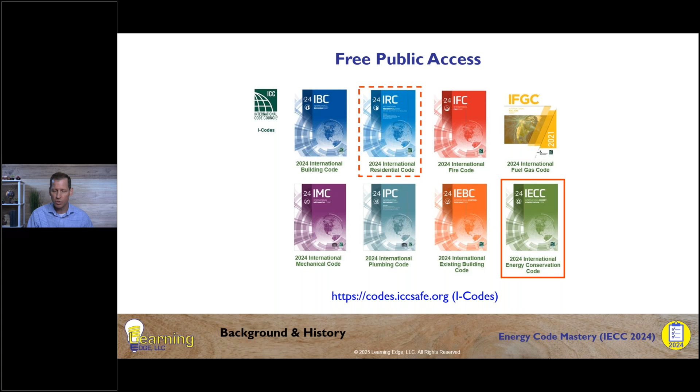We're going to focus our attention almost exclusively on the IECC. That's what our class is about. But, as Mike said, we're going to do a couple of detours into the IRC, because there are things in the IRC that are directly relevant to building science and building energy efficient homes. So I will point that out as we go through the different sections of today's presentation.

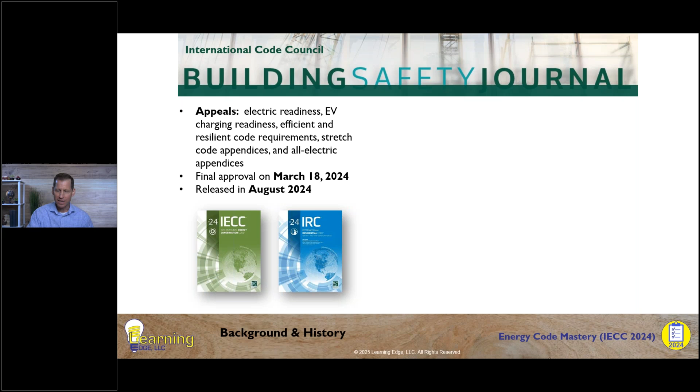So there was a lot of appeals and discussion. Well, the ICC board finally approved all of that, got through the appeals process in 2024, on March 18th. And then that's where in August, they finally released both the IECC and the energy section of the IRC, which I'll clarify in a moment.

So going forward, I think to avoid this problem, what the ICC has talked about is a continuous maintenance process specifically for the IECC and Chapter 11 of the IRC, which is the IECC. So we'll come back to that here in a moment.

The codes, in order to understand what you need to do inside the codes, you need to know what climate zone you're in. And so the climate zones follow the county lines, and the country is divided into 2 sections. Either the west part of the country, except for the coast, is climate zone B, so that's where the B comes from. And if you are east of that imaginary line down the middle of the country, you're going to be getting that designation of A, which is moist.

And it's important to have those two designations because dealing with moisture versus a dry climate is going to make a big difference, of course, we know when it comes to building science and the performance of buildings.

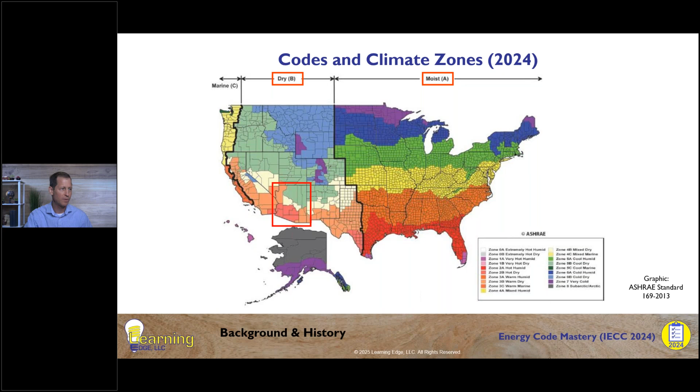And so now let's take a second and talk about that differentiation between the IRC and the IECC. So Chapter 11 in the IRC is the IECC. So if you just wanted to buy one book, you could buy the IRC and you would have the IECC as well in Chapter 11. When you're in the IRC and you go to Chapter 11, one thing you'll notice is it cross-references back to the IECC. So that's where the parentheses come in. 401.2 would be that equivalent in the IECC. So that's how those two work together, but it's identical language.

And it's one of the reasons why the IRC was delayed for a little while, and then finally they released the IRC except for Chapter 11. And that's why we saw on the website, they said, except the energy section.

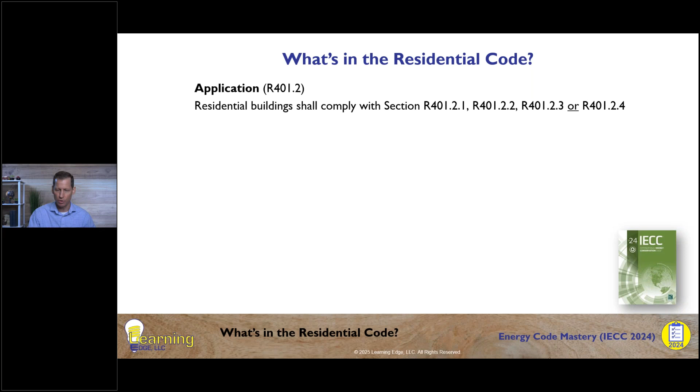Okay, so first off, let's talk about the sections of the code that apply directly to residential buildings. They need to comply with either 401, 21, 22, 23, or 24. These are the traditional pathways that are defined inside the code. So there's a prescriptive compliance option. There's a simulated building performance option.

They added simulated this 2024 cycle because that's exactly what it is. It's the simulated or performance option. They also have the energy rating index option and the tropical climate region option. Those are the divisions within the code, if you will, the pathways. We're going to actually subdivide this a little bit more because there's even more granularity than that.

So the big thing that they added in the 21 code were these efficiency packages. So in other words, you got to meet the code, but then they want to juice it a little bit more and kind of push you down on your efficiency or increase your efficiency, whichever direction you choose to look at it. And so what they added in the 21 code were these efficiency packages, okay? And so the efficiency packages prior to the 2024, I'll show you what those packages were, and you basically needed to go through and pick a package and you were good to go.

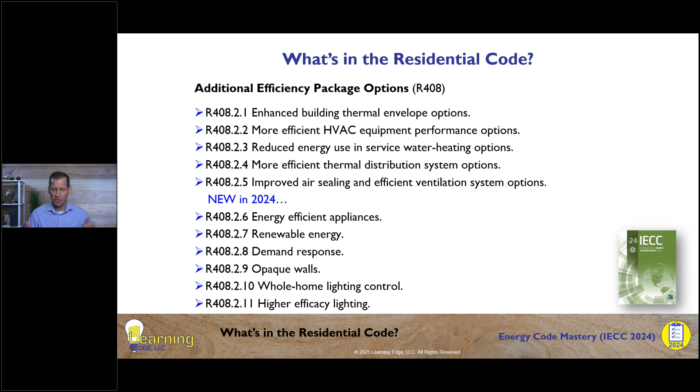If you're not doing the prescriptive path, then everything I'm going to share with you right now, you really don't need to worry about. But there are a fair number of people that still do the prescriptive path. And so picking these packages is essential. And so we want to make sure that you're comfortable with what these are and how they operate.

So one of the things they did in the 24 code is they decided to take the tables and turn them. So most of you remember that the tables up to the 21 code had the climate zones down the left side, okay? And then they put the different options across the horizontal axis across the top. Well, for I think good reason, and it makes sense, what they did is they inverted that so that now we're talking about climate zones across the top, and whatever content they're trying to get you is going down the left side.

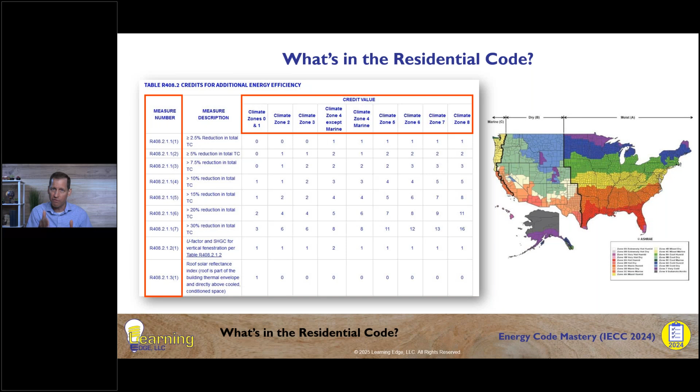And so if you're in climate zone 0, 1, 2, or 3, you're not going to get any credit for doing less than or equal to 2.5% reduction in your total thermal conductance. But you will get credit in the colder zones. So again, you've got to refer back to this table. I'm going to maybe peek at it a few more times today, but I wanted you guys to know that depending on what climate zone you're in, it will define how many points you'll get within each of the categories.

Okay, so the first package is enhanced building thermal envelope options. And one of the things they added in the 24 code that's new is this term that I've already thrown out to you, which is thermal conductance. So we haven't seen thermal conductance, but it is now defined in the code, and you can see that definition over on the right-hand side. Normally we think of U values and thermal performance, but now they've added in another term that we're going to see throughout the code that we need to be familiar with, and that is C factor or thermal conductance. So you'll see that as we move forward.

I just showed you this table. Depending on what you can do to increase the performance of your shell, your envelope, the thermal conductance of your envelope, depending on what climate zone you're in, you're going to be able to get points. And remember, we've got to get 10 points in at least 2 categories if we're in the prescriptive path. That's our objective, and you start accumulating your points throughout the table. And this is one package for the first set of options.

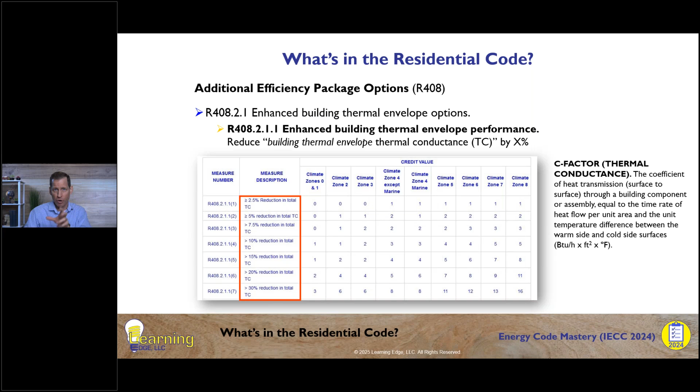Next is enhanced building thermal envelope, improved fenestration. So the last one was improving your thermal envelope, your insulation values, and your shell.

Now, the next option under thermal envelope options is roof solar reflectance index. So now if you do something on your roof in order to make it have greater reflectivity, which is again lighter colors, you can see that now you can get points in this category if you choose to. So I'm not going to spend a lot of time. You guys will get the slides and you can see the highlights as we go through.

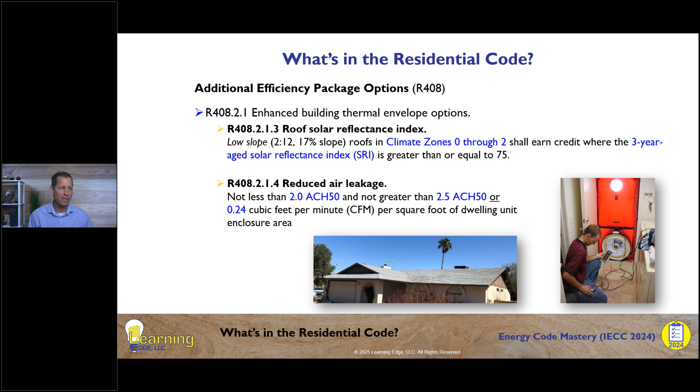Next is reduced air leakage. So in your thermal envelope, if you reduce your envelope leakage to not less than 2. Notice that, this is new, I haven't seen this before, they're actually putting a floor on there. It used to be just don't be any leakier than 3 air changes per hour, 5 air changes per hour. But now what they've done is they said, yeah, no more than 2.5, but we also don't want you to be tighter than 2.

So that's one of the things they've done, they put a little floor on there so that your building will actually still have some leaks. So that's new. Haven't seen that before in the code. They have an alternative of 0.24 cubic feet per minute per square foot of your shell. So you can alternatively calculate the area of your shell, and 24% of that area would give you your CFM50 blower door number.

More efficient HVAC equipment. So this is the second option of packages. So what can we do for more efficient equipment? There's a lot of detail here. You can do option applicable by climate zone. Well, the first one's all climate zones, I'm sorry. So depending on what you do, you're going to be able to get points. Then we've got certain options that are applicable only in your warmer climates, 1 through 3. They have options that are applicable 4 through 8. And then more efficient HVAC equipment for climate zone 4 alone. They do have a specific option for that.

So again, we could spend an entire day going through these packages in minute detail, telling you what all those options are for 0, 1, 2, and 3, but you guys can read the code for that. I want you guys to know what's in the code and make sure that you walk away today going, okay, now I understand what I'm dealing with, this new beast called the 2024 IECC. And so you can spend more time looking into that on your own time and understand this package. And remember, it's if you're doing prescriptive path. If you're doing performance path, which quite frankly most builders will do, then you're not going to even worry about this stuff anyway.

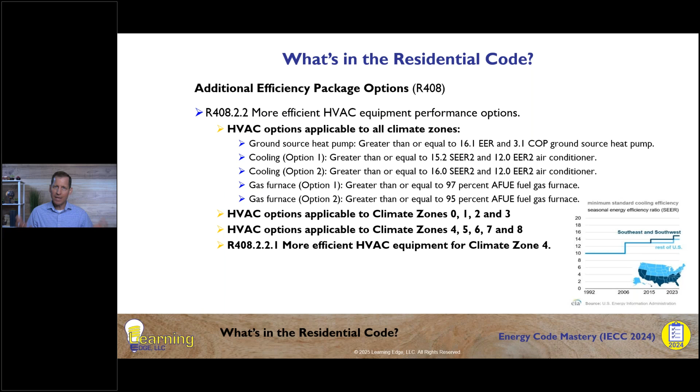Next is compact hot water distribution system options. So within the service water heating, if you are able to create more compact plumbing, you can see the illustration on the right, basically instead of trying to feed the water to the other side of the house, they put in a second water heater, tankless in this case. And so now the run from the water heater to any one of the fixtures is going to be much closer. In fact, the definition is not more than 16 ounces of water being stored. Okay, so that's actually a pretty small number. That's 1/8 of a gallon.

Some of you might be familiar with the WaterSense program and even Zero Energy Ready. They also have requirements for keeping our wasting of water as low as possible, which also translates into not having to heat our water as much. But that is a half gallon, okay? That's a half gallon of water.

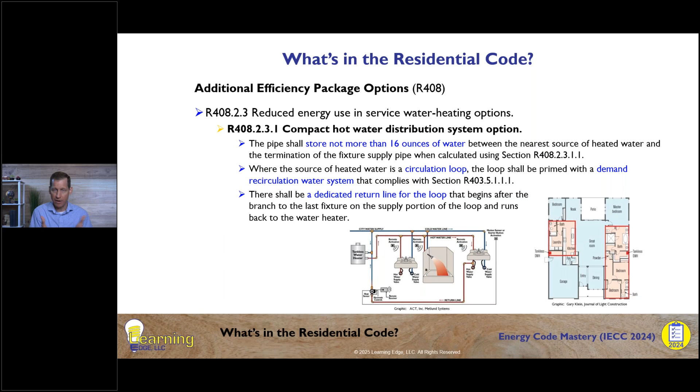And so in the code now a demand recirculation system is what's required. And then a dedicated return loop is also required. You can certainly do hot water recirculation systems that use the cold water line to send the water back to the water heater. But in this case, in the code, they're going to want a dedicated line going back.

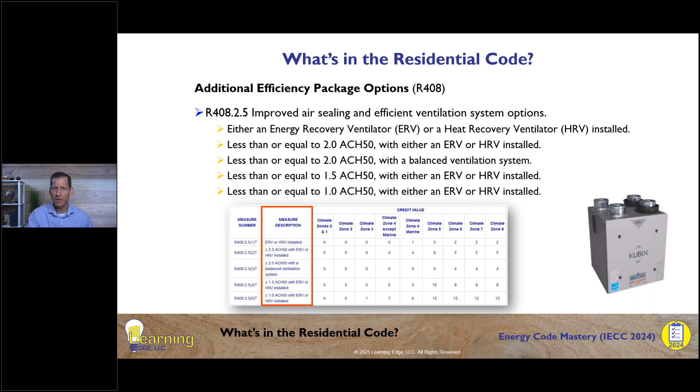Now, improved air sealing and efficient ventilation system options. Again, these were all from the 21 code, but they've beefed these up quite a bit more and changed them for the 24 version. So again, you've got options here. Pick one of these, either an energy recovery ventilator or heat recovery ventilator, HRV, ERV, or less than or equal to 2 air changes per hour with an ERV or an HRV installed. So depending on what you're doing, you're going to get more points, of course. The tighter your envelope with the HRV and the ERV, the best ventilation is going to be from an HRV, ERV. And I love that the code starting in the 21 version has been adding in HRV and ERV. We'll talk a little bit more about that in a moment.

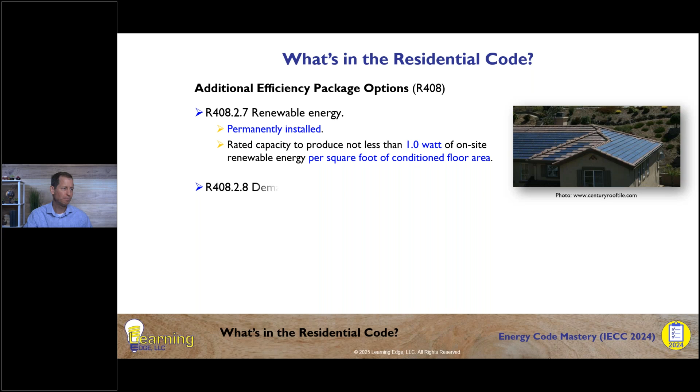Demand response. This is also new. They've added in demand response thermostats. And what's neat about this is what they're trying to do, and lots of things are pushing in the direction of allowing there to be bidirectional communication to our connected appliances, water heaters, programmable thermostats, pool pumps, EV chargers. If those can be in connection and allow for demand response, now we're into an area of virtual power plants, which is an exciting thing that we're now starting to see with the utility companies. And the code has now weighed in on this.

The code is now saying there's a package where you can do demand response so that it will allow for voluntary participation in a utility provider demand response program. And by the way, Mike mentioned NV Energy. They have their Power Shift program.

That is basically a demand response program where they are able to talk to and communicate with all the thermostats in the NV Energy area and send a signal to adjust that thermostat so that on a peak day in Las Vegas, when it's super hot and they know they're going to have a peak, they can send a signal out and then help to manage that demand by taking thermostats and adjusting them.

Now, in those programs, I have to clarify, you can always override it. It's not as much Big Brother as you might think. You can override that if you don't like what's going on. But most of us are not at home and we're working during the peak. We're not there. So for most of the people, they're not going to override it, and that's a huge benefit for shaving the peaks off of our demand curves.

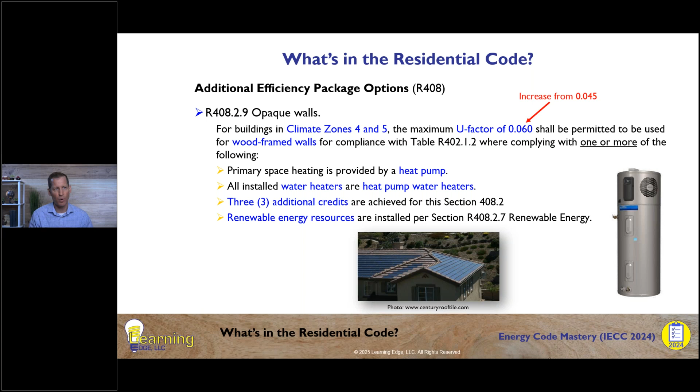You do a heat pump water heater, heat pump on your system. 3 additional credits also in another category. This is just giving flexibility, right? If you can't quite get your envelope to be at the 0.045, this will allow you to have another option.

Whole home lighting controls, right? If you put in whole home lighting controls, there's an opportunity for you to get credits that way. Higher efficacy lighting, okay? All spaces shall be provided with hardwired lighting with lamp efficacy of 90 lumens per watt or luminaire efficacy of 55 lumens per watt. So this is a way of incentivizing putting in more efficient light fixtures.

And you can see when you go back to the table, though, a little bit of a head scratcher. I'm not sure that I quite understand this, but if you decide to do high efficacy lighting, 408.2.11, like we're talking about here, unfortunately, there's no credits to be given. So I'm not sure why you would do it. And I was hoping that maybe when I went back to the code yesterday to see if they had updated, this would change. But quite frankly, it's not.

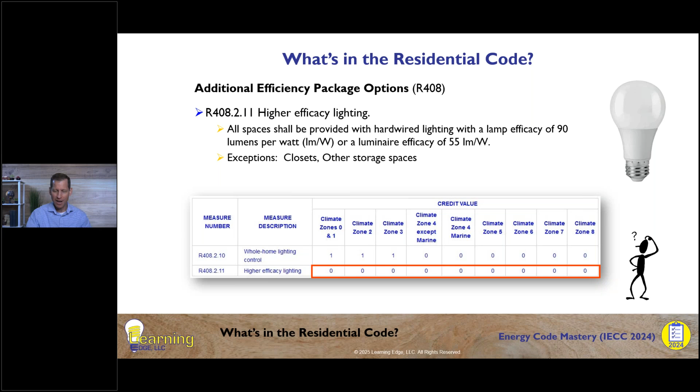So I don't know why anyone would do 408.2.11 when you get 0 points for doing it. I guess it's a feel good. But I thought that was a little odd. But keep that in mind when you go into the code, you'll see this.

All right. So those are the packages. That was the last of the packages. I just wanted to give you guys a highlight so you knew what was in there. We had some original ones. They've beefed those up and they've added in a bunch more packages. And really, if you go and read the preface to the code, which I actually geeked out and did, they talk about how what they're trying to do with the 24 version of the code is create more flexibility, more options in order to comply with the code. And you can see in some ways they've actually been able to do that.

So what I want to do now is look at sections 402 to 404. We're going to look at some of the verbiage. We're not going to go through it page by page, line by line. I'll try to use as many pictures as I can. But I just want you guys to see the highlights of 402 to 404 and section 408. What is it that's in there that I think you should pay attention to? Now, this stuff applies to prescriptive specifically, all right?

Hold that thought for a moment. The first one I want to talk about is 402.2.1. A lot of people are not aware of this kind of hidden item in there. And that is that if you get your insulation in your attic over the top of your exterior walls, over the top plates, all the way out to the edge, then you're allowed in 402.2.1 to lower the actual R-value of your ceiling insulation.

Now, in the 2021 code, one of the things they did was they followed the ill-suited, ill-defined concept of more is better, because more is not always better. And in 2021, what they did is they said, well, we got to keep pushing that glide path to net zero, so we got to throw more insulation somewhere. So let's go to 49 in climate zones 1 through 3.

Well, I'll tell you, R49 in an attic in Phoenix, where I am, makes no sense at all, okay? Makes no sense at all. Yet, if you're prescriptive and you're in Phoenix, you got to do 49. And then in climate zone 4 through 8, you had to go to 60.

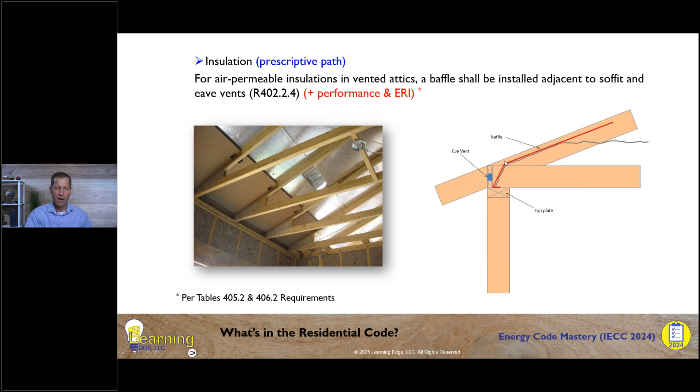This is for air permeable insulation, okay, like fiberglass or cellulose, not foam. For air permeable insulation in vented attics, a baffle needs to be installed, right? So we've got to install baffles so that when air comes in an eave vent like this, the air will push over the top of the insulation, okay, instead of blowing that insulation back.

Now, I want to point out that I added in here prescriptive because this 402.2.4 applies to prescriptive, but this also applies to the performance and the ERI path, okay, 405 and 406. But you need to know that one of the things they did back in the 2021 code, and they've continued forward, is they've created a table in section 405 for the performance. And in that table, it will list the things that you need to do in sections 402 through 404.

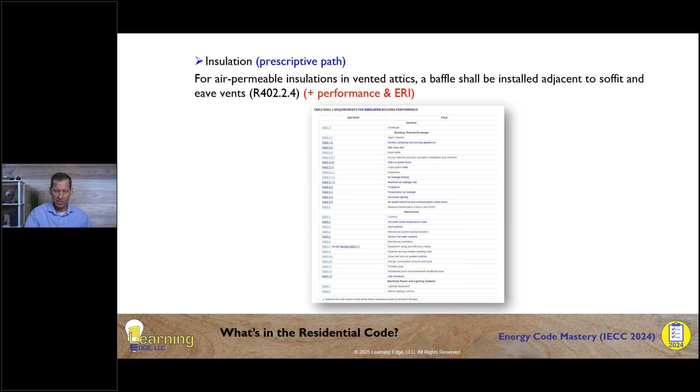So it used to be that they would actually say mandatory or prescriptive. Well, in the 2021 code, they actually put a table in there. So if you want to know what you have to do in section 405 out of the prescriptive requirements, you got to go to this table, okay? So for example, if 402.2.4 is listed in the table, that means in section 405, you've got to follow 402.2.4 in the code.

So I don't know if this made life easier or harder. I think the jury's out. They kept it for the 2024 code, so maybe people didn't scream loud enough if it was a concern. But this is how you navigate the code now. You got to go into the table, and it'll tell you what to do. In the 406, it does the same thing.

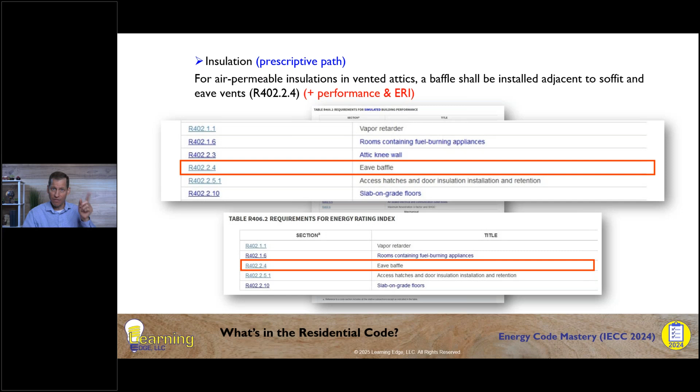So in the ERI path, they have their own table, and in that table, it will tell you what you've got to do out of the prescriptive requirements, 402 to 404. Okay, so that's how you navigate the IECC when you're in 405 and 406. So what I will do now throughout is I will put in red if that section also applies to the ERI and the performance path.

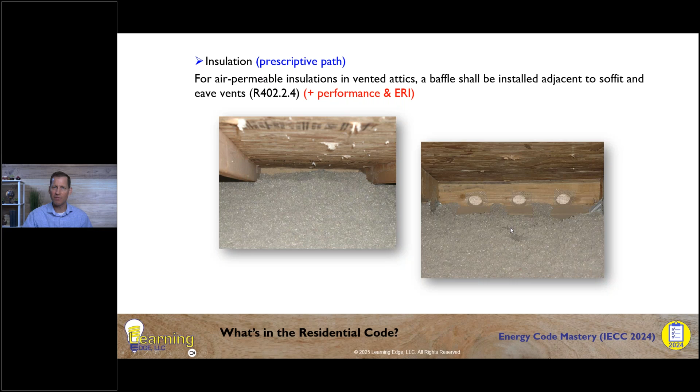But back to this thing. If we have insulation that does not have a baffle in it, here's the eave vents. What happens is eventually the air, the wind coming in will blow that insulation back. And then what we end up with is in the summertime, these smiles up there, this is what it looks like. And so this is why we need baffles, so that that air will come in and it won't push back the insulation. So we need baffles. And again, this is what they look like in order to make sure that that insulation does not get disturbed.

Incidentally, on O'Hagin vents, that's the high vent and the low vent. On the low vent, you also need to baffle that because air can come in an O'Hagin vent and also push that insulation out. Then you got this nice hole below or around it, and that's not going to work. So on the low O'Hagin vent, you really should baffle that as well. That's a good thing for just good building science to do that.

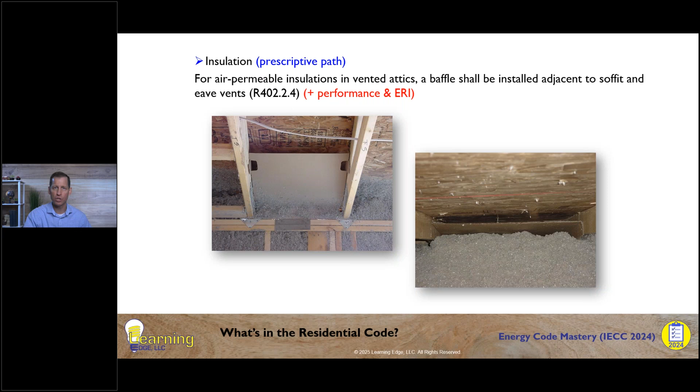Attic hatches, okay? Attic access hatches and doors insulated to the same level as the surrounding insulation. So if you got R30 in your attic, that attic hatch, that little scuttle hole, that's got to be R30 as well. And I'll just tell you right now, gluing a fiberglass batt to a piece of drywall is not going to cut it. Okay, this is a perfect example of what I see all too often when I've been up in attics. They've glued the paper and the paper tears.

Or let's just say you just did a great job of stapling it on there, gluing it on there. Remember, batts, they fall apart along their grain real easy. They tear apart super easy. So that thing eventually from going up and down, that batt's going to be off on the side, never to be seen again. And of course, then we're going to have attic hatches in the summertime that look warm. So this is exactly what it looks like with infrared when you don't insulate an attic hatch.

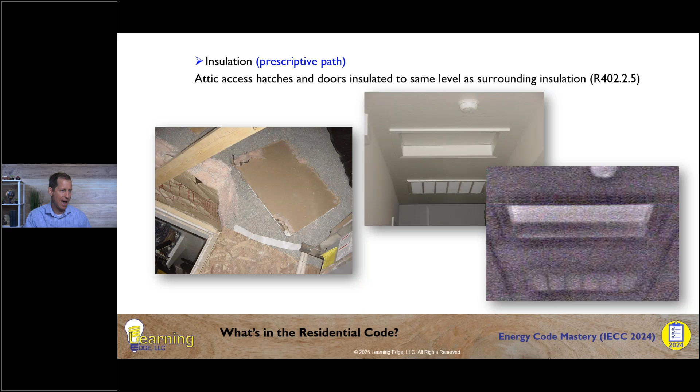So what we really need to be doing is putting a piece of foam on there, okay? So gluing a piece of foam onto that is going to give you your R value equivalent. This is a high density polyurethane foam. So we're going to get much more R value per inch. We don't need as much foam stacked on or glued on there, but that's the way to go. So this is another piece of the attic retention. The attic is the retention piece, okay?

So in here we have, first off, weather stripping. So you've got to make sure you put weather stripping on your attic hatch. Typically, we recommend Q-Lon strip, okay? So this is going to be what we do on the doors that we do for our front doors and our exterior doors. Just take that, turn it sideways, and that's a vinyl strip that is far, far better than the lick and stick or peel and stick foam. That stuff doesn't last very long, but use the vinyl, and this is a great way to air seal.

And then also an insulation dam. This is part of retention. This came up actually in the 21 code. They added it in. I really like it. It's the idea that we put retention on there so we can get our insulation right up to the scuttle hole at full depth. So whatever the depth of your insulation is, you need to make sure the dam's high enough to be able to retain it so it doesn't tail off as you get close to the hole. We can get full thickness right up to the door.

They also added in that when you change ceiling heights within your attic, you're going to run into the same problem where the insulation will tail off right to the edge. Put a retention in there so we can get it all the way to full height, all the way out to the exterior. And then we have the same addition in the code, which happens to do with porches.

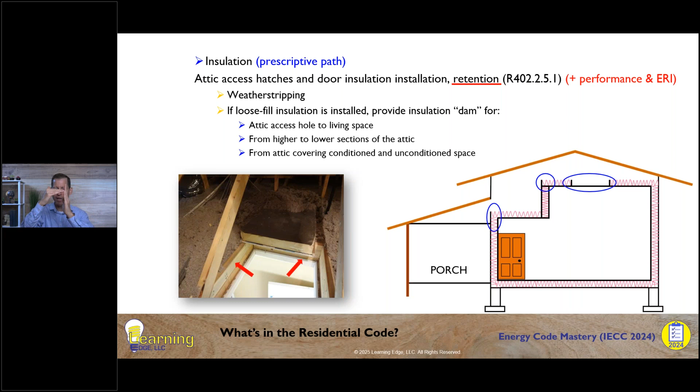So if your porch is not at the same elevation as your ceiling on the inside... if it were, they can just blow the insulation a little bit over the top of the porch, maybe 2 or 3 feet over, and we'll get full thickness before it tails off. But if there's a height change, we don't have that. So it's good building science. I love this, to put a dam in there so that we can get our full thickness, full height of insulation all the way out to the perimeter.

So if we've got, say, an 18-inch deep floor truss, and our insulation is 12 inches deep, okay, you got a 6-inch gap all the way around because that insulation doesn't fill that entire cavity. So I love that they talk about ensuring that we get that perimeter insulated.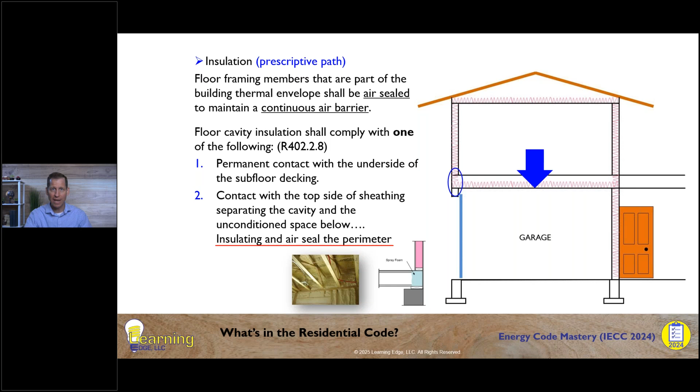But if you've got foam on your project, you definitely need to make sure that those rim and band joists are hit with that foam. If you got a truck out there, take advantage of that to get those rim and band joists done correctly.

Basement walls, okay? This is climate zones 3 and higher. Basically, you got to follow what the table says. So if you're in climate zones 3 or higher and you go into Table 402.1.3, which we'll glimpse at here in a little bit, it'll define how much insulation you need. What we define here is what that layout needs to be for the insulation.

So it needs to be, if you've got... let me back up, I went a little too fast here. If it's an unconditioned basement and you've insulated your floor, then you don't need to worry about your insulation down there, you can ignore it. But if you're not insulating the floor, you've got to make sure that your insulation goes down at least 10 feet below grade or to the floor, whichever is less.

Slab edge insulation. All right, for slab edge insulation, this is actually a little bit of a change from the 21 code. And you can see here that a kind of holdover from the 21 code is that if you are in climate zones 0, 1, and 2, you do not need slab edge insulation. In a hot climate like Phoenix, climate zone 2, you don't need that. But 3 and higher, you're going to have to put that in.

Okay, what they added in to the 24 code is they made it clear that if you have a heated slab, no matter where you are, even in climate zone 0, 1, and 2, you're going to need to put in a minimum insulation on your slab edge and under the full slab. Makes total sense. If you go down deep enough, the ground is usually about 55 degrees.

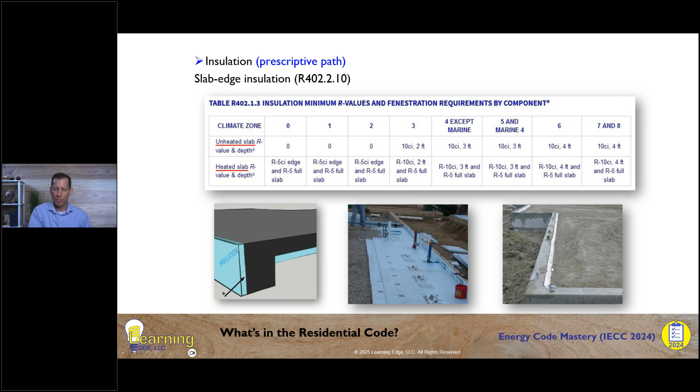Okay, and this is just one of those details that I kind of ran through a little bit there, is that you can put it on the inside of the slab, as you can see here, nice chamfer cut so that we don't have this big gap on the perimeter of our slab, or you can run it on the outside. If you run it on the outside, it should not be exposed.

This is a nice detail here. Ignore the disconnected downspout there, but the detail with the stucco on there, great detail for your slab edge insulation, making sure that it gets done correctly.

Crawl space wall insulation, okay? So where installed, crawl space wall insulation shall be secured to the wall and extend downward from the sill plate to not less than the top of the foundation wall footing. All right. So you've got that.

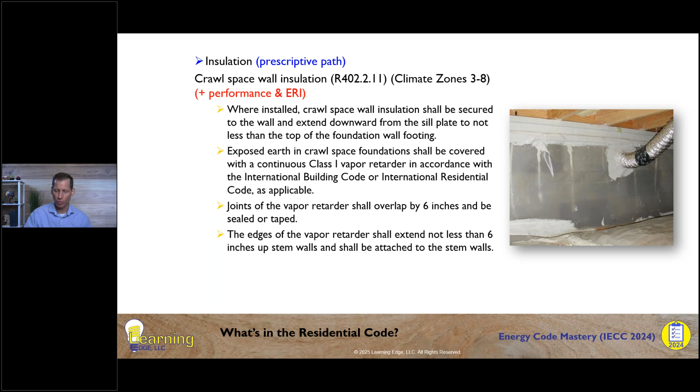You need to make sure that if you've got exposed earth, that you are covering that with a Class 1 vapor retarder. Class 1 is a vapor barrier. Okay. Vapor barrier, Class 1 vapor retarder. You've got to make sure those joints are sealed, make sure that it's lapped up and fastened around the perimeter. So they have clear definitions of, if you do a crawl space, what you need to do to comply with code there.

Radiant barrier, this is new. Prior to the 2024 code, there wasn't anything about radiant barrier in the code, but in 2024, they added it in several locations. So where did they add it? First of all, radiant barriers is in section 402.3. This is prescriptive path only. Where installed, radiant barrier needs to comply with ASTM C1743.

There's also, in the general definitions of the IECC 202, a definition of what a radiant barrier is. Okay, material having low emittance surface of 0.1 or less, which of course is the definition of a radiant barrier, 0.1 or less. They also talk about reflective insulation, okay, and what that means, because in the code, we're also talking about including that.

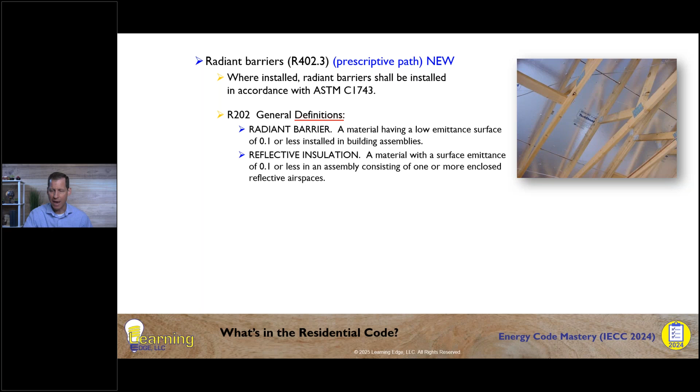They talk about airspace, where the R-value of an enclosed reflective airspace. So this is another place where they're talking about radiant barrier. And then 303.2.2, they talk about where installed. So these are the sections where radiant barrier was added into the code. I might have missed one, but I don't think I did. But the cool thing is that radiant barrier is now in there.

So you're getting credit in the code for radiant barrier, where before 2024, there really was no place for you to get credit in the code for doing it. Except, of course, if you did it in the performance path, your energy model could give you credit, and that's an indirect way of getting it. But the code itself outside of the performance path, you're not going to be able to get credit for radiant barrier, whereas now you can.

Fenestration, okay? This is prescriptive path only. The area weighted average of fenestration products shall be permitted. So if they call out a U-factor or a solar heat gain coefficient, then you actually can do the weighted average of that. So let's just say that the solar heat gain coefficient is 0.35, and you go into a house and you see 0.34, perfect, 0.35, check, 0.32, check, 0.36. You got one window at 0.36. Well, that window doesn't necessarily fail because of 402.4.2. As long as you've got plenty of windows that are below, then the area weighted average is going to be good.

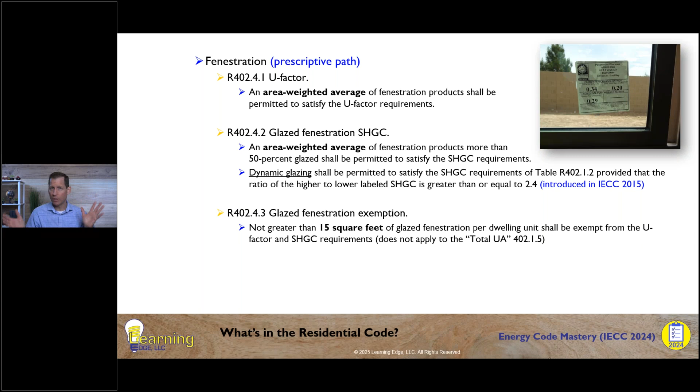They also do a glazed fenestration exemption. So you're allowed to have up to 15 square feet of window glazing that is not compliant with the code. So this takes care of the occasional butt jointed windows or things of that nature. So there's a little bit of an exemption there.

And then for opaque doors, remember, fenestration is both windows and doors. And so for opaque doors, there's also an exception. You get up to basically one standard size door, 24 square feet, that does not need to meet the code. They give you only one of those, I call it get out of jail free cards. You get that in the opaque door, 402.4.4. Okay, so air sealing is in the code.

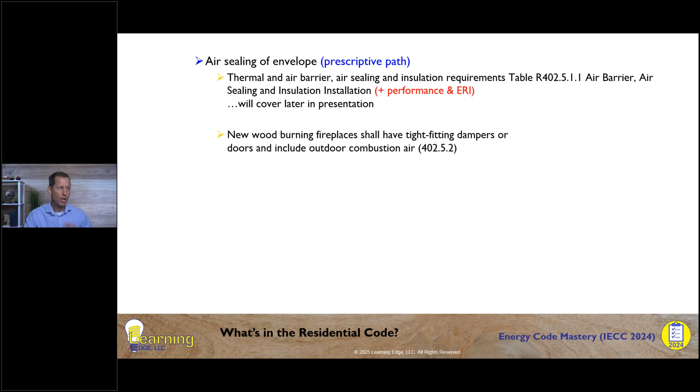It applies to prescriptive, performance, and ERI. Thermal and air barrier, air sealing, and insulation requirements are defined in table 402.5.1.1. That's the thermal bypass checklist in the code. I'm going to come back to that one when we get to the end on testing and inspections. New wood burning fireplaces shall have tight fitting dampers or doors. The code requires insulation contact airtight (IC-AT) light fixtures. Specific air tightness requirements for doors and windows.

Now, this is a little bit of a catch, because here's NFRC stickers where you get your performance information on windows, right? There's the U-factor, there's a solar heat gain number, which we've talked about. There's the visible light transmittance, then there's air leakage. But notice on this NFRC sticker, they put NA, okay? What about this one? Dash. On this one, they didn't even add it. There's not even a box for the air leakage. A lot of the time, in fact, most of the time, windows do not include this information.

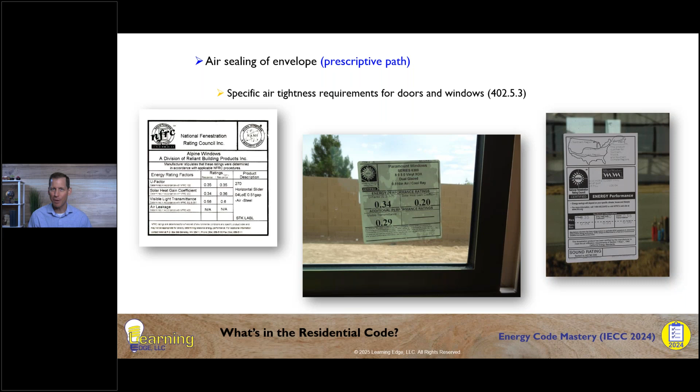Now you could go back, because the code has a specific requirement there, to the contractor, the builder, and make them get you a label or that definition of what is the air leakage on this window. But I'm here to tell you that is a hill you don't have to die on. Rely on your blower door number, okay, your envelope leakage. If all the leakage was in your windows, that means they'd have to tighten everything else up. So just rely on your blower door number, which is required, and don't kill yourself to get this information out of the contractor when it's not readily available. Just a tip on that. If you want to go all out, you can require the air leakage number for your windows. But again, it's not really that necessary because you've got blower door.

Electrical communication outlet boxes penetrating your air barrier. So if you've got an outlet box on your exterior wall, you definitely need to make sure that it is compliant with air tightness. It used to be in the 21 code that it was a little ambiguous, because it says electrical communication outlet box that penetrates the air barrier of the building thermal envelope. So if your air barrier is the exterior or the inside, that's where this applies. And then of course, the box needs to be labeled NEMA OS 4. This is the requirement that's in there.

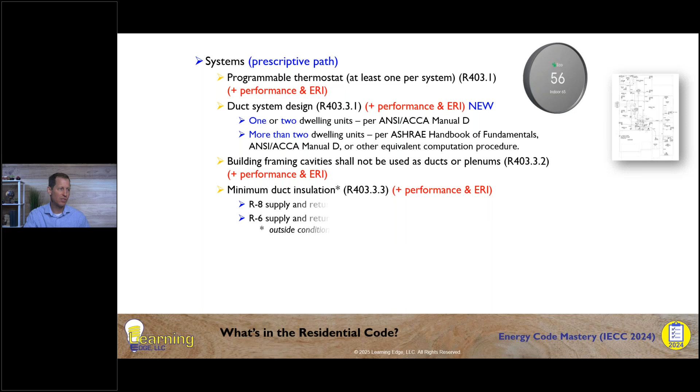Duct system design. This has been in the code going back quite a way, that you've got to make sure that your duct system design is, actually this one's new, sorry. The mechanical sizing's been around, but the duct system sizing is new. 1 or 2 dwelling units, ANSI/ACCA Manual D for duct design. More than 2 dwelling units, you can follow the ASHRAE Handbook of Fundamentals. So apologies, I got in front of myself a little bit. This is new. They didn't have duct design requirements until the 24 code. Building framing cavities shall not be used as a duct or a plenum. That's been around. Minimum duct insulation, R8 for your ducts that are bigger than 3 inch, but if you've got your high velocity 3-inch ducts, then you can go down to an R6.

To be considered inside conditioned space, they give 3 options for the ductwork: 100% within the continuous air barrier, ducts in a vented attic or unvented attic with vapor diffusion ports, or ductwork within the wall or floor assemblies. Each of these options, 403.3.4, I actually cover in my ducts in conditioned space class. So if you want to dive deeper into this and the code requirements, that's a great class you might consider taking to learn about the details. Ducts, air handlers, and filter boxes shall be sealed, all right?

Got to make sure that your ducts and filter boxes, they're all sealed. Air handler unit cabinet leakage no more than 2% of the designed airflow. Here's another item where your air conditioning unit manufacturers, they're not readily providing the leakage of their cabinets. Can you get it? Yeah, but it's not readily available. And you're not going to be having the rater test the tightness of your unit to see if it's 2% of design or not. This is another one, like windows, where I say, I wouldn't die on this hill, okay?

Don't demand to know that that air handler is no more than 2% leakage, because quite frankly, rely on your duct leakage requirements. As long as that thing hits the duct leakage requirements, you're good to go. So that's what I would do. And if the cabinet is too leaky, well, they're gonna have to have really tight ducts then.

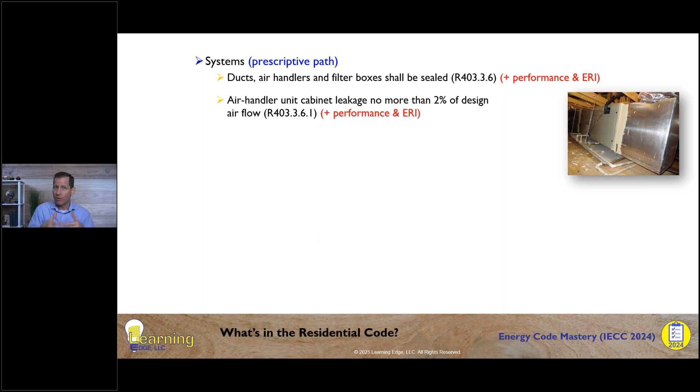So this is one of those things also as a code official, there are bigger fish to fry than fighting over this when we know we've got a duct leakage test that's going to tell us how tight our duct system is, and make sure it hits that number and you're good to go. Duct leakage testing requirements, I'll cover that when we get to testing.

Circulating hot water system installation criteria. So if you're going to put in a hot water recirculation system, there is a definition of how to do that. Some people confuse the fact that because the code talks about circulating hot water systems, that the code requires a circulating hot water system, but in fact it doesn't. The code does not require that you put a hot water recirculation system in. If you install one, you have to follow the code's criteria, but it's not required. And I'm gonna make that even more clear here in a minute.

So they do have a requirement for prescriptive, performance and ERI. In the 21 code this was only prescriptive, but in the 24 code, they added in performance and ERI. And depending on what you've got for your piping, if it's 3/4 inch or larger, or fits any of this criteria, you're gonna need to put an R3 insulation on that, you're gonna need to insulate it.

The minimum insulation is actually in a table and actually a formula. So it used to be R3, but now they've elaborated and there's a calculation to determine how thick your insulation needs to be instead of a one size fits all. Yes, it definitely got more complicated. Something that was simple now has been more complicated on your pipe insulation.

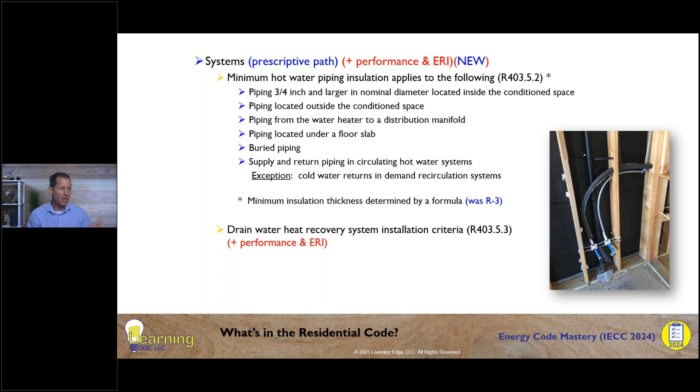Drain water heat recovery system. If you install one, they have installation criteria, because this does not require you to install a drain water heat recovery system. And the only reason I said something that's kind of silly is because, again, I've talked to code officials that require hot water recirculation systems. And I'm trying to say, no, you don't, it's not required in the code. It's only required to follow the rules if you install one, because not all homes are required to do a drain water heat recovery system.

Now, here's that mechanical requirement that I accidentally just misspoke on. So this is the design requirements for Manual J, Manual S that are in the code. You've got to refer, in this case, to the IRC. I told you there's a few places where you have to go and look elsewhere. This is one of them. So in here, you go and you look at the IRC M1505.4 for the requirements for the ASHRAE ventilation.

Now, what they did in the 24 code is what I suspected they would do: they added in an HRV, ERV requirement for climate zone 6. I wasn't sure if they were gonna add 6 and 5, but they added 6. So in the 21 code, you had to do an ERV or an HRV if you were in climate zone 7 or 8, and I love it. The best ventilation strategy is an ERV or an HRV.

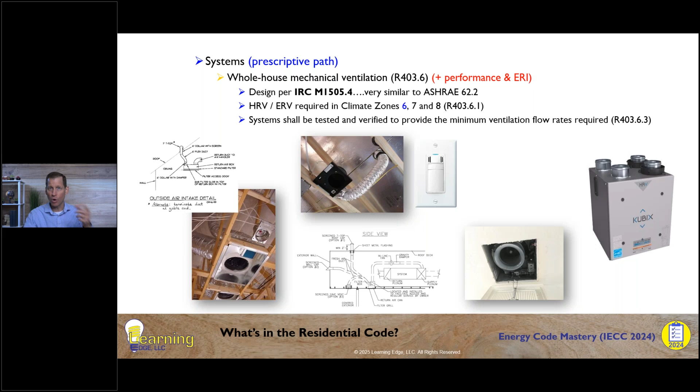And if it's really cold outside and you got to spend a lot of time indoors when it's snowy and cold and wintry, then you're going to need to make sure you have the best ventilation. So the code in 21 required that it be in climate zone 7 and 8. In the 24 code, they backed it up to climate zone 6. Lastly, the system shall be tested and verified to provide minimum airflows. And then we'll come back to this one again in the testing and inspections.

Intermittent exhaust controls for bathrooms and toilets. This is new, okay? This is new.

Where an exhaust system serving a bathroom or toilet room is designed for intermittent operation, the exhaust system controls shall be one of the following. So now what they're doing in the 24 code is they're saying that you've got to put controls on your intermittent exhaust, either a timer, occupancy sensor, humidity control, contaminant control; any one of these you need to include on your bath fans.

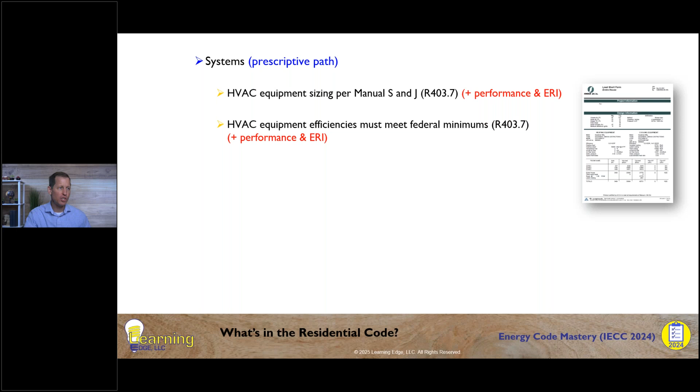Here's the sizing. So for HVAC equipment sizing, you need to follow Manual S and Manual J. This has been in the code, this is what I was saying before, this has been in the code since 2006. Equipment efficiencies must meet the federal minimum standards, 403.7.

Electric resistance space heating, this is new. This basically applies to 1 and 2 family dwelling units, climate zones 4 through 8, so your colder climate zones. If you're doing electric resistance space heating, they've got specific requirements that you need to do. Space heating capacity limited to no more than 2 kW. The largest space that is not used as a bedroom shall install a heat pump. So this is trying to get rid of the bigger energy consumption, which is electric resistance in buildings. So they do have this new requirement, 403.7.1, that is added in for the 2024.

Requirements for mechanical systems located outside. This is a new requirement in the 24. So if you're heating outside a building, snow melt systems, roof and gutter de-icing controls, freeze protection system controls, any one of these is going to require that you follow certain requirements that are outlined in the code. And again, I'm not going to spend time walking through each one of these requirements. If you have any one of these things, then go into the code and see exactly what it requires.

Now, snow melt and ice systems are in the ERI and the performance path as well. But I want to reiterate that just because snow melt and ice system controls are in the code doesn't mean that you've got to install a snow melt and ice system in every house. And I know that's facetious because we're not going to have that in Phoenix, but I'm going back to illustrate the point that a hot water recirculation system, just because it's mentioned in the code, does not mean that it is required by the code. Now, municipalities can adopt it into the code. Keep that in mind.

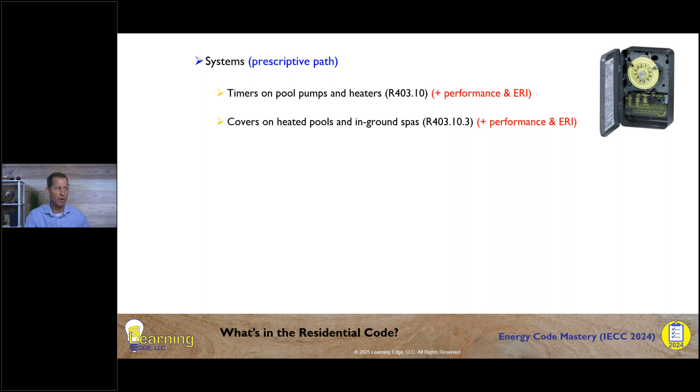Timers and pool pump heater requirements, covers on heated pools and in-ground spas if they're heated. Gas fireplace systems shall not be equipped with a continuous pilot light, so they put that requirement in there. Gas fireplace efficiencies, that's new, adding that in there.

Electric power, lighting and renewable energy systems. So lighting requirements and power requirements for all permanent light fixtures. Now what they've done is they've added in not less than 45 lumens per watt, not less than 65 lumens in your lamps. They've beefed up; it used to just be 100% efficient. Now they've clarified that in terms of lumens, which is more accurate, and you're going to get more of what you're looking for there. And so for lighting power allowances for building exteriors, you can see this is what we're looking at for the requirements for the different products.

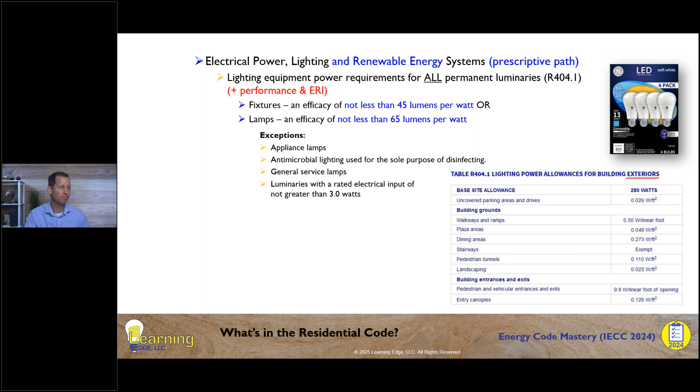Interior lighting controls, you can see they added in habitable spaces versus garages and unfinished basements, what needs to be done there. So there's more requirements there. Exterior lighting controls, prescriptive path only. This is if you've got 30 watts or more on the outside of your building. So if you've got a couple of LED light bulbs that are less than 30 watts, you're only going to get about 2 bulbs to do that. Any more than 2 bulbs, and you're going to need to put in exterior lighting controls. Again, prescriptive only on that one.

Okay, I know I went lightning fast, but I wanted to get through what is in the code, just so you know what's there. You'll get a copy of my presentation and you can go back and look at the details of the highlights. But you're going to need to spend time looking at those individual requirements if they apply to you or you're trying to do one of those things.

Now, when it comes to appendices, we had 3 appendices up through the 21 code: we had a Board of Appeals, we had a solar ready provision, and we had net zero energy. That was in the 21 code.

And I wanted to clarify that the appendices are not mandatory. If something is in an appendix, it does not apply to the buildings, not unless your municipality adopts an appendix into the code. This is important to know. So if you're in a municipality and they start citing stuff in the appendix, then you need to say, wait a second, was that adopted into the code? Because if it's not adopted into the code, I don't got to do it.

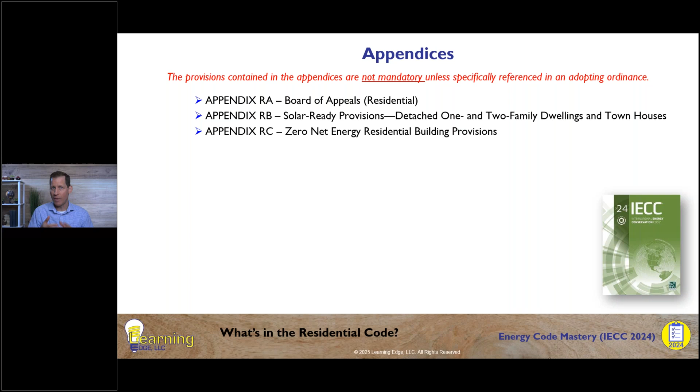So there were some things that were in the code through the end of 2023 that were going to be adopted as permanent items in the code. And what they did in the appeals process is they didn't actually throw out some of these things. They just moved them from mandatory in the code to an appendix, non-mandatory. So some of these things that are in the appendices, we may see in the future. They may move them from an appendix into the code in the future. But for now, they've got a home in the non-mandatory part of the code, which is the appendices. So keep that in mind.

And again, we could spend an entire day going through each of these appendices so you guys could understand what's in them. We clearly don't have time to do that today. So I'm not going to do that. I will leave it to you to go through the appendices and look at them one by one for the contents.

I will stop for a second and comment that one of the things the code has now done is made the need for a professional to help you as a builder or a designer; you need a professional that understands all of this stuff, because now it's just getting more and more complicated. A little like the tax code, right? When the tax code was one page, you could do it yourself. But as we continue to beef up and get into more and more details, now you've got to have outside help to make sure you comply with everything and you don't miss anything. And also that you make sure that you're not doing anything more than you need to, which comes to our options for complying with the code.

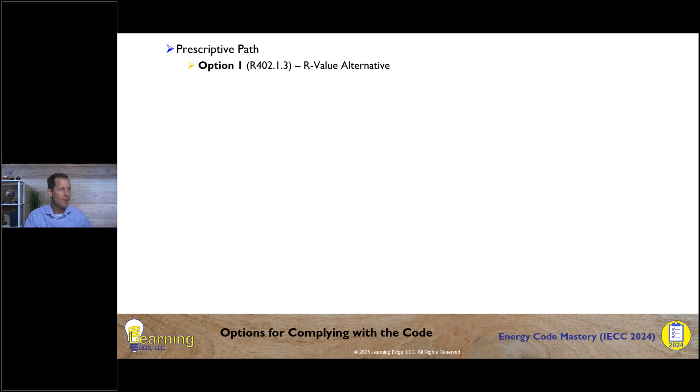And then you just go to this table and it's pretty simple. You do what it says. Prescriptive, though, in order to be a one size fits all, because you're not being very specific to that home, or as specific, these are going to be high numbers. You're going to be doing a lot of extra material in the prescriptive path, because they've got to make sure, the ICC and the municipalities, that if you do prescriptive, that home is a good one. And so they've got very elevated requirements, but there's ways to fine tune things.

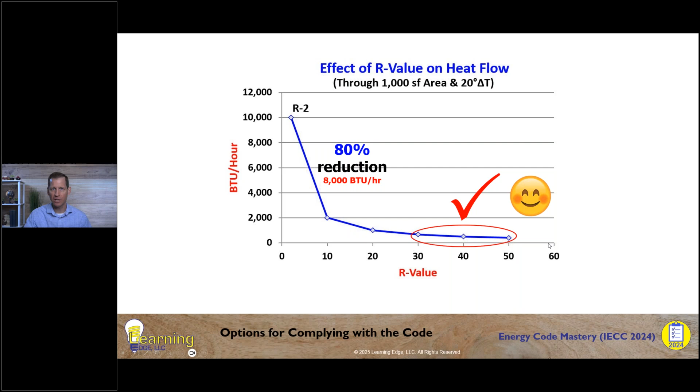And here's that chart I wanted to show you guys about law of diminishing returns. I thought I had it earlier, but it's here. And so you can see that your biggest bang for your buck is actually your first little bit of insulation. But as you move out towards the tail, you can see that we're getting law of diminishing returns. And so this is one of the reasons why I'm pretty confident they backed off and went back to that, because you're really not getting anything from R49 to R60. You're just not getting much, and certainly not in Phoenix. In climate zone 2, you're not getting much. So I like what they did backing off on that.

Now, remember, I already talked about the slab edge insulation, right? So what's new is they're adding in a heated requirement for climate zone 0, 1, and 2. If you do a heated slab, you're going to have to do a slab edge insulation, which is new. You need to, if you're following prescriptive, meet all of the requirements in the table, meet all the requirements in 402 to 404, the stuff we just reviewed. You meet all those requirements, and then you've got to go get 10 credits out of the additional energy efficiency packages out of 2 of the categories. If you're 5,000 square feet or bigger, then you're going to need to get an additional 5 points, if you recall from what I shared with you. This is one option for complying with the code.

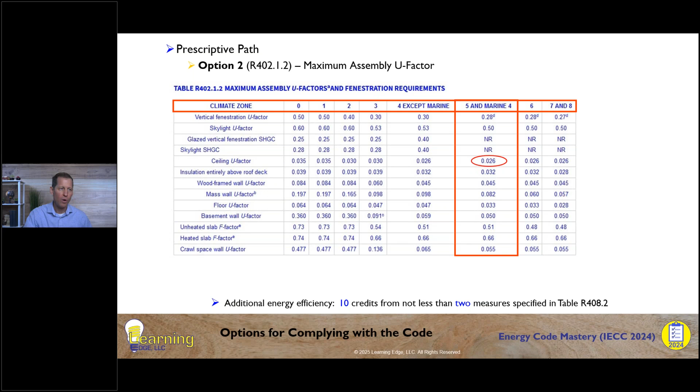The next option is the maximum assembly U factor, okay? And so in this case, depending on what climate zone you're in, you've got to hit these U factors. So now it is the assemblies that we're looking at. So for example, let's take a ceiling. We're not just talking about putting an R30 batt or an R49 batt in there, or blown in insulation. We're actually talking about the U factor for the assembly. So if we translate 0.026 into an R value, which is the reciprocal, you can see that we get about an R38. Remember that it's normally R49, but what we're now saying is that you don't need to be R49 for your assembly, because we're talking about some wood in the path, we've got some drywall. So it's a system. And so that's where the U factor comes in. And you're basically allowed to insulate at about R38 if that whole thing works out.

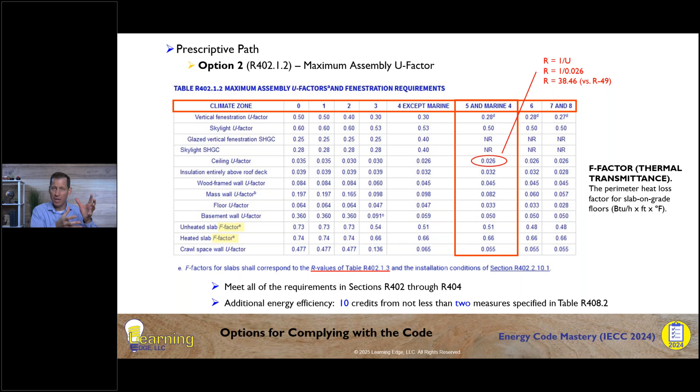Now, how are you getting the U factor for your assembly figured out? That's basically computer software doing that, okay? That's not something typically being done by hand calculation. Notice that they've also thrown in here the F factor. Remember I said that F factor was going to be thrown in? Okay, this is that thermal transmittance. I said thermal conductance before. This is a new factor that they threw in, thermal transmittance. So meet the requirements in the table, do everything in section 402 to 404 that we highlighted, and then you've got to go get 10 points out of the packages, and you meet the code.

Option 3 is the component performance alternative, okay? In this case, we're basically going to go back to the table that we just looked at, 402.1.2. We're gonna grab the U factors out of that table, and you can see here are the factors. You take the U factor from the table times the area of that ceiling or wall or window or floor, and you calculate those two numbers, and it's going to give you basically a unitless number. Then what you do is you say, what am I doing in the house I'm building? So let's just say we want to do a little worse. Lower is better on U factor. So we want a little worse in our ceiling. We don't want to do quite as good. Fine. And in our window, we don't want to be quite as good.

So we're going to do a little worse on our thermal conductance for our windows. And then if we do that, though, we're going to have to do better elsewhere to make up for it. So there's some trade-offs in the shell that are allowed in your option 3, which is the component performance alternative. So now we can do 0.030 or 0.040 to make up for the fact that we did a little worse in other areas.

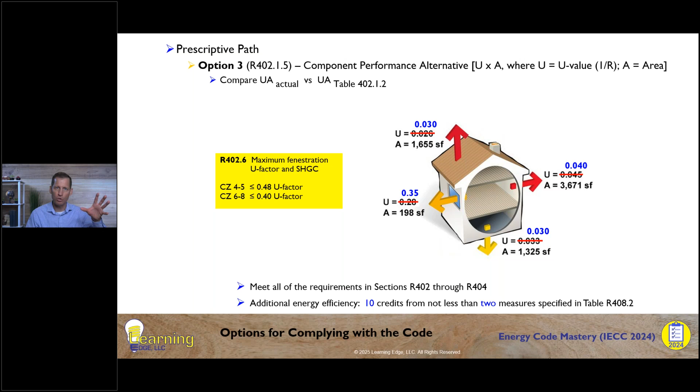Now they put a limit on your windows and doors for what your U factor can be. So climate zones 4, 5, 6 through 8, they do say that you can only go so high on those, and they limit it to no more than 0.48 or 0.40 in the colder climates. So you basically meet all the requirements in section 402 to 404, plus you do this little math comparison, get 10 credits and you're good to go.

This is absolutely done with software, right? And so your REScheck software will run this calculation for you, okay? And as long as the IECC reference is greater than your as designed, you are good to go. It'll meet the requirements of the code. So that's your third way. And by the way, all 3 of these methods I just shared with you are part of the prescriptive. So prescriptive is not just one, it's 3 subpaths within the prescriptive.

Then there's performance, okay? This is our 405, simulated energy performance, where you're basically putting all of the characteristics of the home into the software. The software will then kick out a performance for you. How are you doing? They have the same limits. So you can only go so bad on your U factors in climate zones 4, 5, 6 through 8. They've added in that your solar heat gain coefficient in the hottest climates cannot be any worse than 0.40. So they've put a few backstops in here when you're doing performance path.

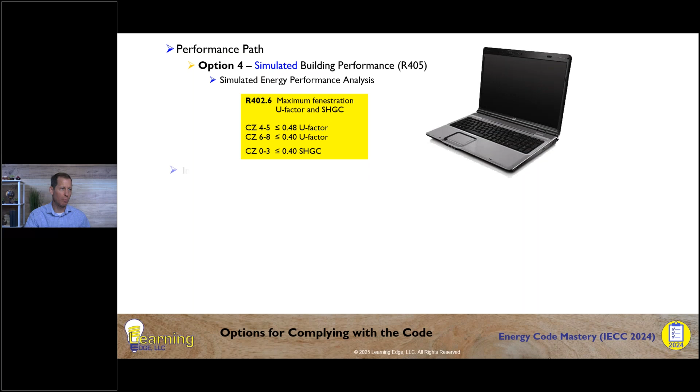The thing about the performance path is that unlike the prescriptive path, we actually can trade off and get credit for heating, cooling, and water heating. So now it's not just the shell performance, it's also the performance of your heating, cooling, and water heating. This gives us much greater flexibility in our trade-offs. So if you do a poorer other area of your building envelope, well, you can make up for it in doing a really efficient air conditioning unit, for example, okay?

The maximum allowable total building thermal envelope conductance is now allowed to be this. So in climate zone 0 through 2, what they're saying is you can be 8% more in your thermal conductance from whatever the reference is. So they're going to allow you to be only 8% worse. And if you're in 3 through 8, you can go up to 1.15, or 115% in your thermal conductance. So they're allowing you to go no more than that in your 405 performance calculation.

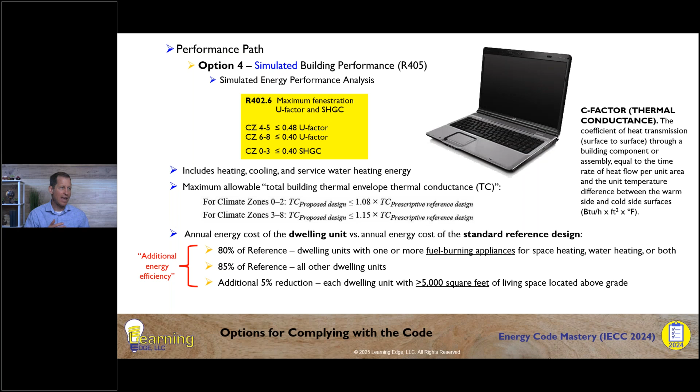Annual energy cost of dwelling units versus the annual energy cost of your reference. We're comparing the energy costs in this one. So you've got your reference design energy cost and the home you're building, and you compare the two. So this is how they're doing additional energy efficiency. Instead of following one of the packages in the 24 code, they did away with that, and they basically said you're going to have to be at 80% of your reference building.

Okay, so dwelling units with one or more fuel burning appliances, you're going to need to be at 80%. So if you've got gas appliances, they're going to require you to be 20% better than the reference. So you don't get to just hit the reference. You've got to hit the reference, and then you've got to be either 20%, or if you're all electric, you can be 85%, 15% better. So they're giving you some parameters.

In the 21 code, basically what the 21 code was saying was meet the code and be 5% better. That's what they did with the additional energy efficiency in the 21 code. In the 24 code, they pushed the envelope, okay? 20% better and 15% better. Now, if you're larger, add an additional 5%. So you could be required to be as much as 25% better than the reference home.

So that's how they're juicing the code to get onto that glide path to net zero. Maybe even overshooting it a little bit, according to my chart, but maybe not. And so you can see that if you do performance path, it just got harder. Not just 5% better, it's going to be 15 to 25% better, depending on the size of your building.

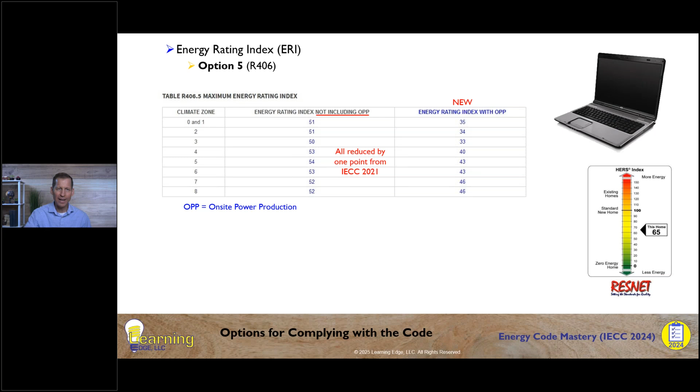Now, what else do you have to do? This includes heating, cooling, and service hot water heating. So it's going to include all that because that's what an ERI does. They put the same parameters on for thermal conductance. Okay, you've got to have limits on this, climate zone 0 through 3, and you meet all the requirements in 402 to 404 that are in the 406.2 table.

Okay, now above code programs. This has been in the code for a long time. They did change the number, but it's 104.11, and the local municipality can deem a state, national, or local energy efficiency program to be above code. And typically it's going to be the Energy Star program. So they can say, if you're Energy Star, you meet the requirements of the IECC. Done. That's certainly something that your municipality can do.

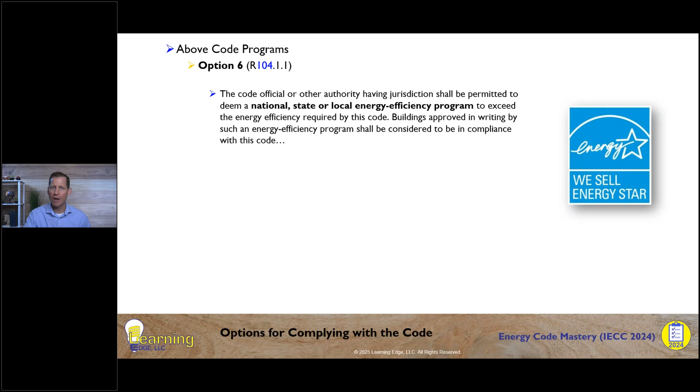But not all programs are Energy Star. So one of the things they did is they put some backstops in. If you're not Energy Star, which does meet these requirements, your building needs to meet certain minimum requirements for the cherry picking table for R405. That's table 405.2. So you've got to make sure you meet those minimum prescriptive requirements. And you also need to make sure your thermal envelope at least meets the minimums, climate zone 0 through 3, for thermal conductance. So not just any program can qualify, there's some minimums there.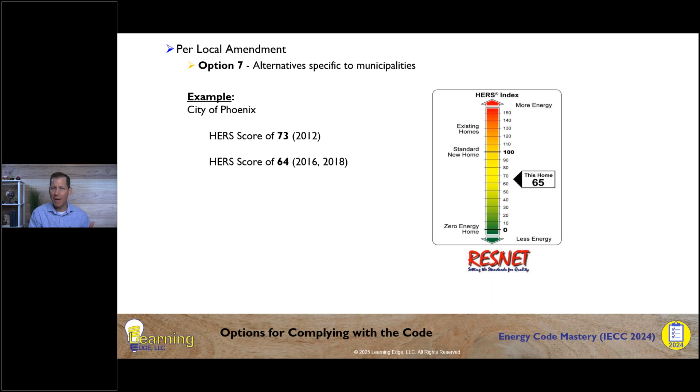Local amendment. Okay, City of Phoenix actually adopted the HERS index, not ERI. This is before the ERI was in the code. They basically said if you were a 73 or lower, you met the code. Then they lowered it to 64, and I think they're probably still at 64. This is a whole other option for compliance, an example of one that your local municipality can adopt. So this is a local amendment that can also be a path for compliance, which the City of Phoenix did, and a lot of the municipalities within the Phoenix metro area followed.

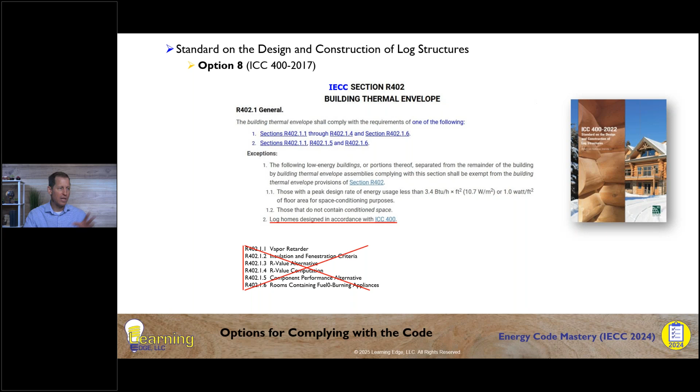There's one more path option, which is 8. This is for log homes. So if you're building log homes and you go to the IECC general provisions R402.1, they have some exceptions in there, and the exceptions include log homes. You can comply with ICC 400 and it will take care of all of those sections I just crossed out at the bottom. So if you follow ICC 400 for log homes, you don't need to follow the main code when it comes to this. It gives you your requirements for your thermal envelope and for your infiltration, and it only applies to the log portion of your building if it's a mixed structure.

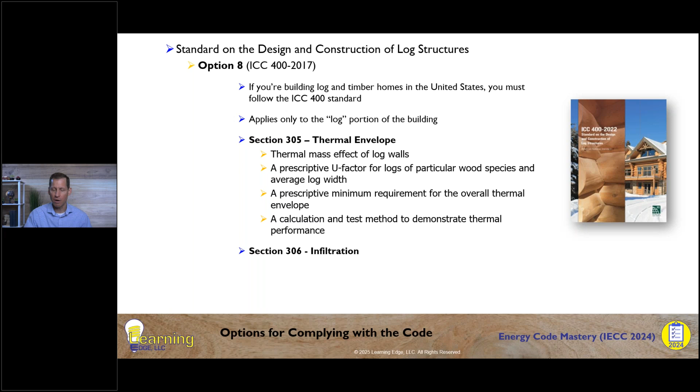There's a lot. I will tell you, most of the builders are doing 405, the energy simulation, right? So this is the one because it creates the greatest flexibility. It includes the most stuff, and it also excludes a number of prescriptive requirements. So most of the builders are doing the simulated building performance R405, and then you can decide for yourself how hard the other ones are, but I think you might have a sense of that after at least getting an overview that I've provided.

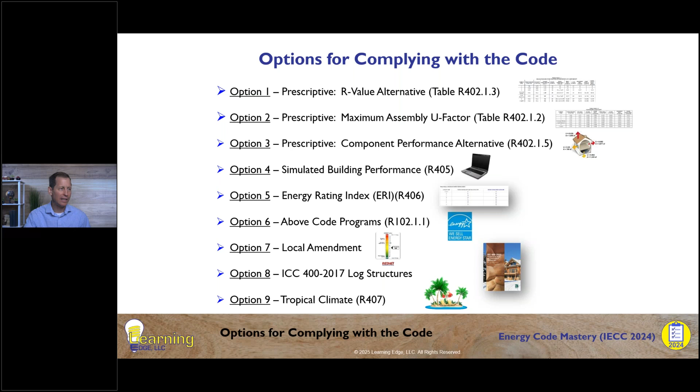So let's look real quickly at the testing and inspection requirements, because if you're building to the code, you're gonna have to have somebody helping you out with testing and inspections, third party, okay? So they've added a number of things into the 24 code when it comes to testing and inspections. For example, sampling. They've added in sampling, but what they did more specifically is they excluded it from single family homes, okay, and townhomes. So we were doing sampling when it came to the code and code compliance for many, many years, and we still are because the 2024 code has not been adopted.

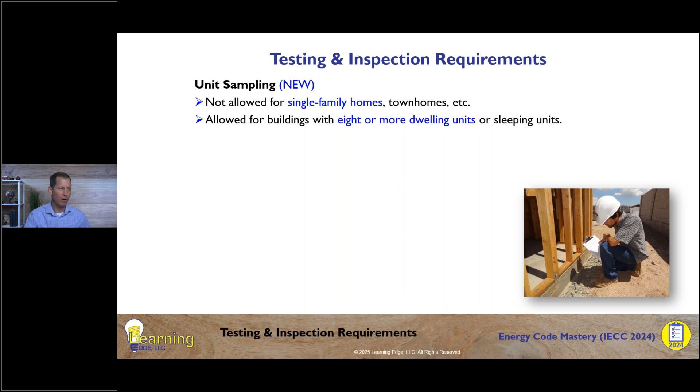And I don't know if municipalities will say it's still okay or not, but nonetheless, the code explicitly says you cannot do sampling for single family or townhomes. However, it is allowed in your 8 or more dwelling unit buildings. So if you've got a building with 8 or more units, they will allow you to do what we basically know as our standard sampling process, which is 20% of your dwelling units, okay? What is allowed to be sampled? Envelope leakage, duct leakage, ventilation system testing. That's what you can do sampling on, according to the 2024 IECC.

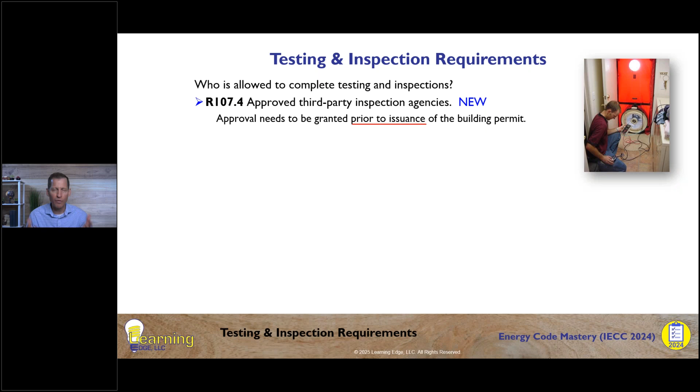They also add in there who's allowed to do the testing inspections. It was silent on that. But they've given some helpful advice on this. Approved third-party inspection agencies have been defined, okay? You need to have approval prior to the issuance of your permit. So technically, the municipality will not issue a permit until you've said who's your third-party inspection agency, and they need to approve them. They're either on a list or you've proven that they know what they're doing. In fact, here's your authorization, okay?

So 107.4.1 says, what are the requirements? Who's authorized to be independent? First of all, demonstrated independence. Equipment, adequate equipment for the performance. They've got to demonstrate they've got that. The personnel should be credentialed, trained. There needs to be documentation that they're a rater or BPI certified or National Balance Institute certified. Whatever the requirements are, they need to be able to prove that they meet those requirements. An approved third-party inspection agency, there's a definition of what is reporting. What do you got to do for the reporting?

So they've really beefed up the testing and inspection stuff inside the 2024 code, which I think is kind of handy because it's been, I think, a mixed bag across the country as to what do we need to do? What are the requirements? Who can do this? What credentials do they need? The 24 code has added that in, and I think that's a good thing.

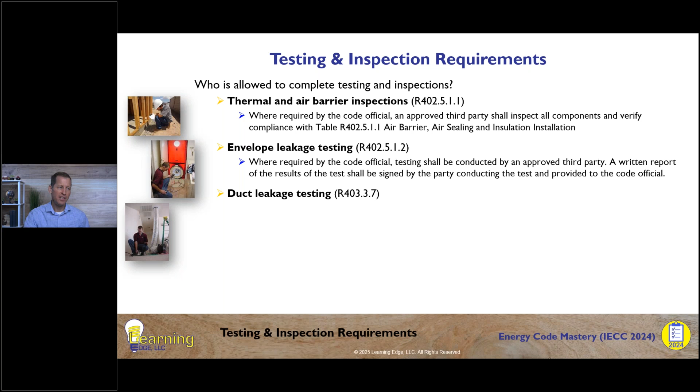Now, the code up to today, up through the 24, has defined that thermal and air barrier inspections are by a third party or can be by a third party, envelope leakage testing by a third party, duct leakage testing has not, and still doesn't define a third party. I wish they just took the same language out of envelope leakage and stuck it into the 24. And of course, I'm guilty for not making a public comment on that and a recommendation during the code hearings. Slap my wrist for not doing that. I was hoping somebody might wake up and do that. It's not a big ask, but they need to say explicitly for duct leakage, third parties allowed, like the language you see there. For ventilation, they did it. They went and grabbed the same language and said third parties acceptable.

And then lastly, for the energy rating index, you need to have somebody that's going to verify all those ERI components. This was added in the 21 code. It continues forward. Pretty much this language right here was in the 21 code. It just carries forward to the 24. So this was all there already.

Now, visual inspection of your air barrier. What they've defined now, and actually it's been defined in table 402.5.1.1. It's now not table 402.4.1.1, it's 5.1.1 in the 24 code. And so you can see that there is a thermal bypass checklist there. What do you got to do for your air barrier? What do you got to do for your insulation to make sure they're done right? And this has been in the code book basically since the 09.

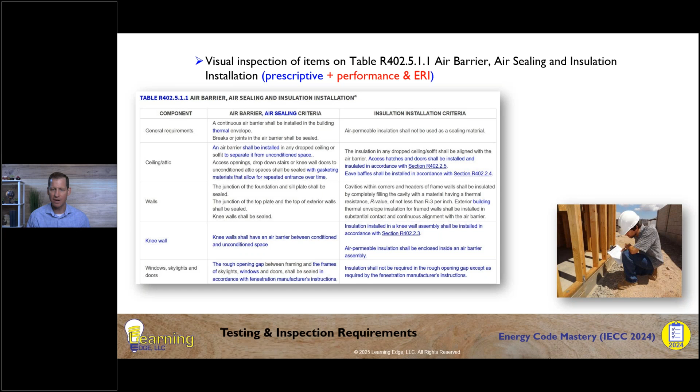Okay, now it wasn't like this. It didn't look quite as organized as this until about 2015, if I remember right. But 2009, they actually had a thermal bypass checklist. And notice that if you're log homes, they put the exception in here, right? So for log homes, you do not need to follow this. They've got their own set of requirements in the ICC 400.

Framing and air barrier rough-in inspections. This is new. So now they're actually talking about what do you do for a framing and air barrier rough inspection? Okay, air barrier inspections at framing rough-in shall be made before the application of permeable insulation and shall be used to verify compliance with this code. So they put in clarification of what does an inspection for framing and air barrier look like, and when does it happen? Rough-in inspection.

Insulation and fenestration rough-in inspection. So they're defining that. Inspections at insulation and fenestration rough-in shall be made before the application of interior finishes and shall be used to verify compliance. So there you go. Now they've got definitions of insulation inspections. Okay, this was not in the code prior to 2024. This is new stuff.

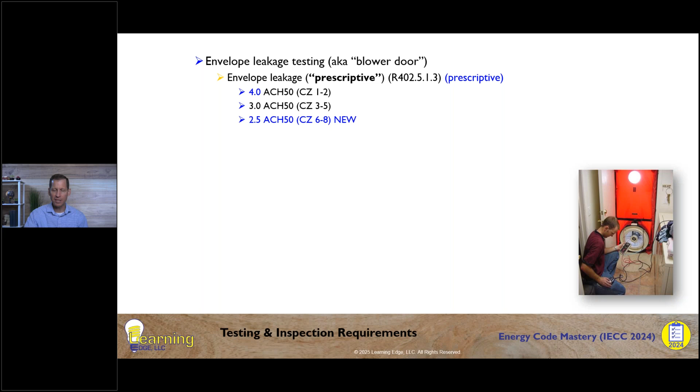Envelope leakage. Okay, this is new, not envelope leakage testing, but what they did is they added in a little bit more granularity. It used to be 3 and 5 air changes per hour up until 21. Now what they've done is they've actually changed it so it's climate zones 1, 2, 3, 5, and they added in a new one, 6, 8, okay? And they've said 4, 3, and 3, 2.5. So this is a little more granularity, wanting to make sure that our homes that are in our colder climates are a little bit tighter, okay? A little bit tighter. So that is new for the 2024 code.

Now for envelope leakage, what they've done is they've got a performance path that they did have, that even if you're prescriptive, you can follow the performance option in the code. This goes back to the 21 actually. And so the maximum allowable used to be 5 air changes per hour for performance, but now it's been dropped down to 4. So in the warmer climate zones, we're going to have to get our buildings a little bit tighter. We were at 5 forever. I say we because I'm in climate zone 2 in Phoenix, but now they've decided, hey, we need to juice that lemon just a little bit more, and now it's down at 4.

They also said that you could do your percentage of your envelope. So 0.22 cubic feet per minute per square footage of your building thermal envelope. So they allowed there to be a percentage of your envelope. There is an exception. You can take 0.22 and you can go to 0.27, a little bit worse if you're talking about multifamily buildings. And keep in mind, multifamily buildings have a lot of common shared walls, floors, ceilings.

And so the only place that is infiltration to the outdoors is that exterior wall. Well, that could be 1 out of 6 sides, right? 1 out of 6 surfaces could be to the outside. And so they're allowing you to have a little bit of an elevated target. So you don't have to be quite as tight if you're multifamily buildings, dwelling units 1,500 square feet or smaller. So they put this in the 21 code, a little bit of an exception allowance. Yeah, at least it's recognizing the difference between multifamily and single family when it comes to that.

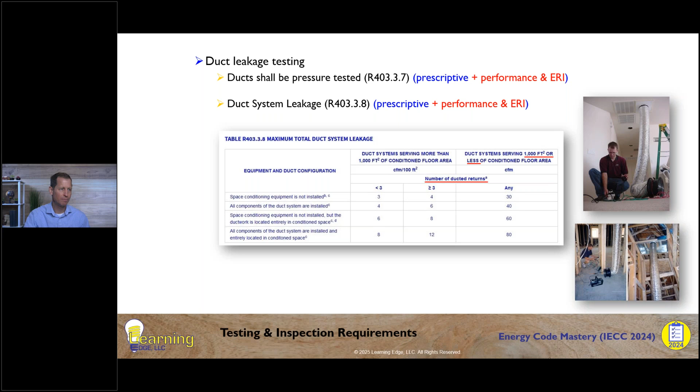So I'm not even going to dive into this in detail. Your rater will help you sort this out, but this is now the new requirements for duct leakage. You got to go into a table, and depending on how many duct returns you have, your square footage, whether it's a small or a large building, defines what that leakage is. And then ventilation also needs to be inspected.

All right, Mike, I hit our mark. We were hoping that I'd be there right at the half past mark, and it looks like I hit it.

We covered a lot today. We squeezed a lot. I know you guys probably have a lot of questions and want more information on details, but we wanted you to have some background and history. We wanted you to know what's in the code, details or highlights at the very least. We wanted you to be aware of the options. There's not just 1 or 2 options for getting through the code. There's a lot of ways to comply with the code. Now you know up to at least 9 of those ways.

And critically important is also to understand testing and inspections, which really have been taken up a level in the 2024 code in terms of definitions and what is required, who can do it, their requirements, as you saw in there. So we've shared a lot of information with you guys today.

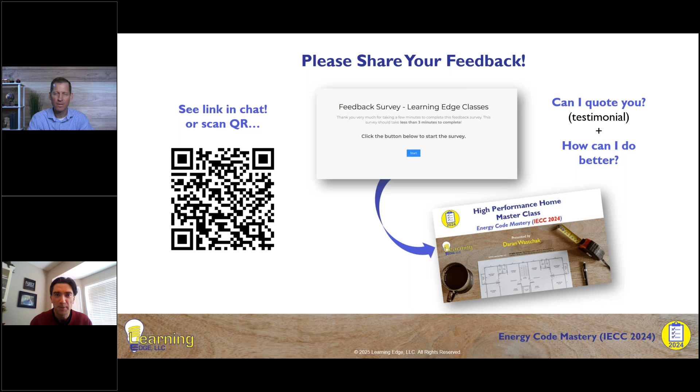Okay, Mike, now I'm actually finished, I suppose. And if there's any questions, I'm happy to take those. All right. Well, we're going to let Daran get a drink of water while we let people know that they can send in their questions via the questions box. I will ask on your behalf. We have many, many questions that have come in already, Daran. So buckle up because here we go.

We got a question from Clement, and this was early in the presentation. What is the lowest CFM of leakage that you've ever seen in a house or a residential unit? Have you seen anything less than 0.24? So the only time I see anything down at 0.24 is if AeroBarrier is being used, where they're doing AeroBarrier and really sealing that up for most of the houses to get down that tight.

Now, that's what I've seen, but I haven't seen everything, that's for sure. But if you're going to be down at 1 air change per hour or sub 1, man, you're doing really, really well.

And so if you're telling me that 0.24 is something that you've seen, I've never seen anything that tight before. But of course, I've never tried to push anybody that far to get that tight. And honestly, Mike, it's one of those other areas of law of diminishing returns. You're going to get your air tightness down to a certain place where going tighter, you're not getting really any energy benefit. You can thump your chest and go, man, I killed it on this one.

But I don't know that there's really going to be a huge energy benefit once you get down below that 1 air change per hour. I mean, there is some benefit, but it's, again, law of diminishing returns when we get down that tight. But congratulations for anybody that gets down sub 1. Like I said, I've only seen that in examples of houses that have got AeroBarrier used on it to seal everything up. So anyway, that's my response there, Mike.